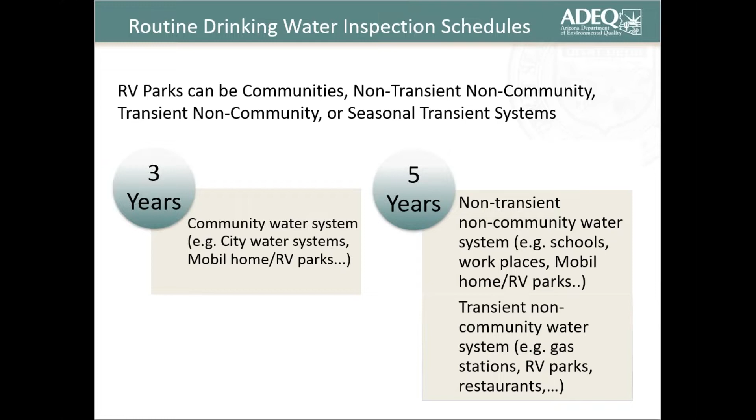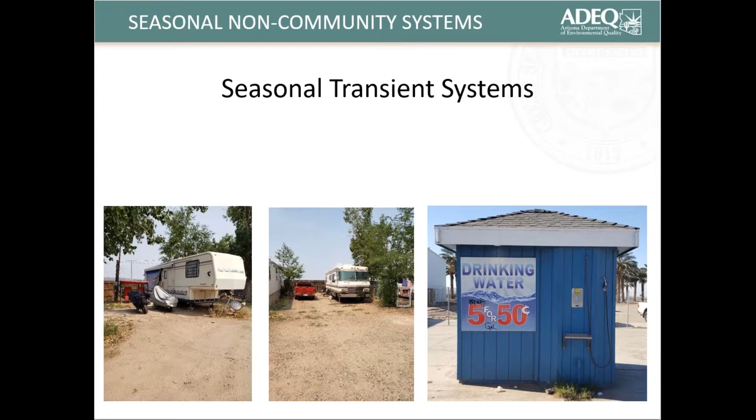We're going to go over our pre-inspection checklists on these systems. Not all of them are seasonal, but they do get inspected, so a pre-inspection checklist is always sent out to a system. So you got summer homes.

They can also be seasonal, to where residents live during the summertime or even during the wintertime in an area for less than 6 months, and they move back to their normal communities or homes in other states and even Canada. So camping sites are under this. Roadside rest areas like ADOT, rest stops on I-40 to I-10, they get inspected every 5 years.

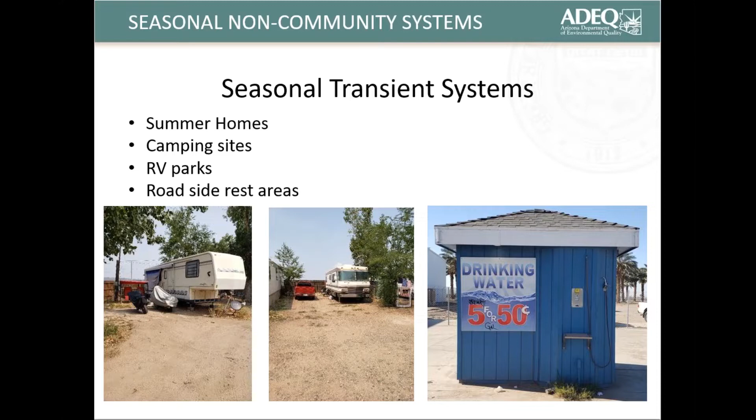Every 5 years. So as we schedule drinking water inspections, 15 days before announced inspection, we contact the system. It's either going to be the administrative contact, which is our first point, and if the administrative contact does say the designated operator will be the one running point, then we get a hold of him. Occasionally, we'll find the designated operator is also the administrative contact.

So just one contact. We always like to have 2 emails, one from the owner. Be sure to indicate to the inspector if you are a seasonal system and you may not even be open when we're calling. We don't know everything. We don't look closely at systems. We just get assigned and we'll look at them and try to give a call and see when we can set it up. If that's the case, we put a little note in saying that next quarter or in the summer we'll be out. Unless you close during the summer, then it'd be the winter that we'll be out.

If the system is currently open, then of course we're going to schedule the inspection within 15 days, or we would also like to know when you're available. So if that week is not working, we may just schedule it for the next week. You might not get 15 days, but we'll work with you. We don't want to send it out over a month unless you are not open, then we will.

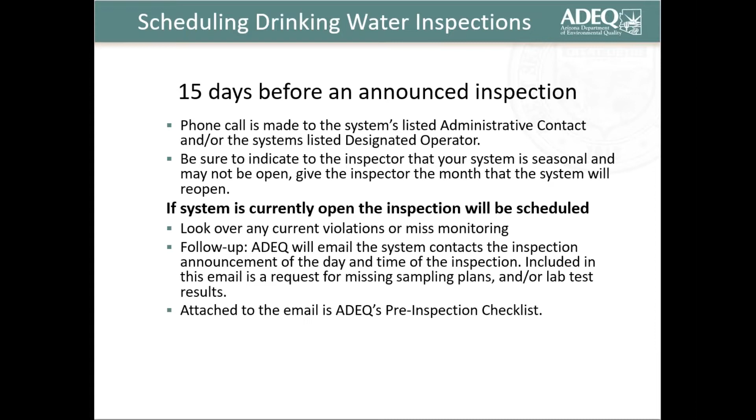So attached to the email after the phone call will be this pre-inspection checklist. And of course, we will also send this to the CAC, or copy them, so they can let us know whether or not your monitoring and reporting is a non-violation or non-issue. This is a seasonal startup form. I believe it's just 2 pages.

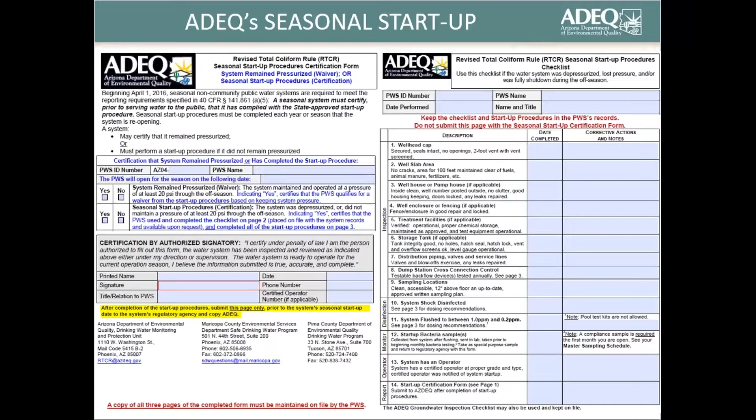We send this out, or the CAC will send it out, and you go through this seasonal startup procedure. You might already have one written down in a book, and that's fine, but you will have to submit this. We'll talk more about this in the next presentation with Jennifer Crow.

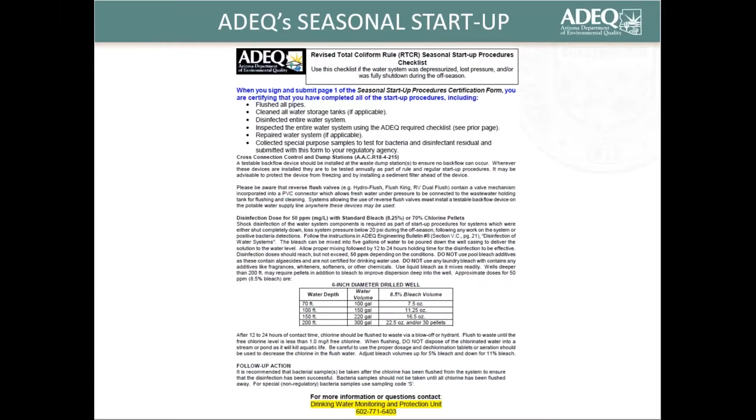We'll go over the seasonal startup paperwork for that. I believe this is the last page of this, and it talks about your seasonal sampling for your revised total coliform rule, and then you will continue monthly after that, and hopefully not having to do resampling, which costs the system a little bit more money. So we're going to prepare for that.

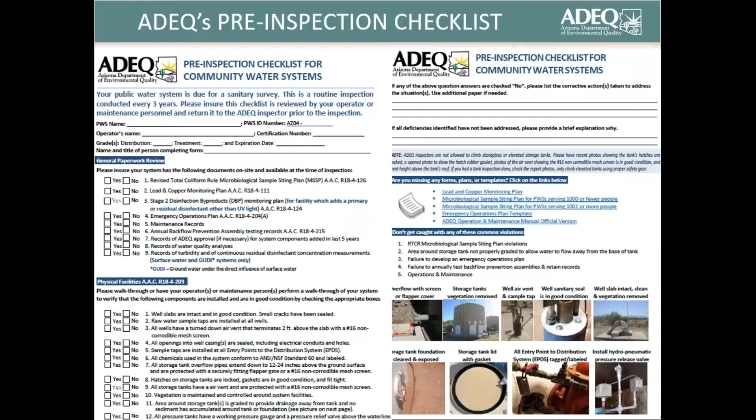This is what ADEQ's pre-inspection checklist looks like. Currently, it's 2 pages. On the left side is the first page, and on the right side is our second page. We'll look at this pre-inspection checklist a little closer in the next slides.

Top portion of the first page of our pre-inspection checklist goes over what would be a violation. So the public water system enters its name, their system ID number, their operator, the certification number, the grade of that operator. If it's a treatment system that runs with treatment, removing arsenic or nitrates, then he should be a treatment operator, at least 1 or above. And then we're asking for the expiration date, name and title of the person that's completing this form.

Could be the operator, could be a maintenance man. We don't require who does it. They don't have to be qualified. They just need to know how to follow the form.

Of course, all systems are going to have a revised total coliform rule to provide samples for. This pre-inspection checklist is for communities. We do have 2 other checklists for non-transient and an additional one for transient systems. So things are going to be a little different. However, this one holds all the information for every one of them. So we're going to go over the community system.

As a community, you'll have a lead and copper monitoring plan. You'll also have one if you are a non-transient system. Stage 2 disinfectant goes for both those systems also if you are using a disinfectant. If you're using UV lighting, then it is something else. You don't need to worry about disinfectant byproducts with UV lighting.

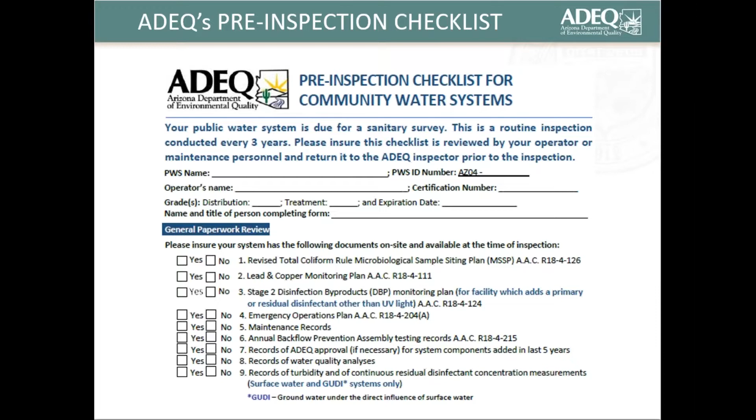You need to retain records of water quality analysis, records of turbidity on record or on site for surface water or GUDI systems. The lower part of the pre-inspection checklist is the physical walkthrough of your system. This is important. The inspector is going to go through this as well. And if you've already filled this out and checked yes or no and present it to the inspector, it won't stop him or her from going on with the inspection and looking through it also.

So you want to look to make sure your well slabs are in good condition. Got any small cracks around the casing, you can seal them with a product that you can buy - bath and tub tile, regrouting, silicone, anything. Since it does not involve the water, we don't need to see that it's NSF approved or ANSI.

A raw water sample tap is important so that if you do have a total coliform hit, you can go back to your well, take a sample there, send it to the lab with the other repeat samples, just to prove that the well is not the issue. If it is the issue, then you're going to be disinfecting your well until it becomes negative for total coliforms.

We look for air vents. They must be 2 feet above the slab and have a number 16 non-corrodable mesh screen attached to the end or somewhere in there. All openings in the well casings are sealed. Sample taps for the entry point are labeled.

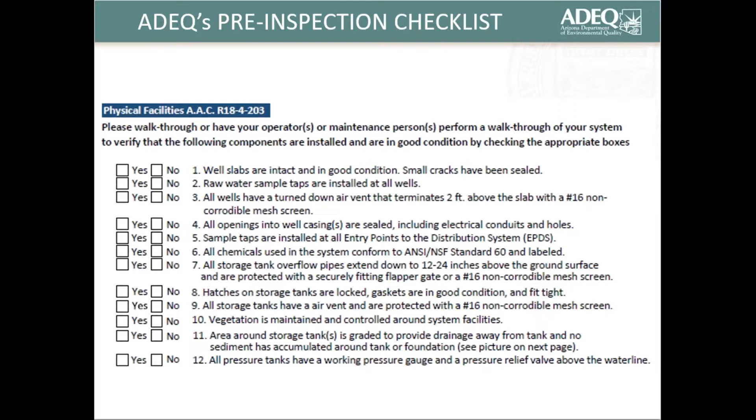Another thing we look at is a sight gauge. However, in freezing areas, we won't require you to replace it if it froze and broke off, because you lose a lot of your product by the time you realize that it cracked and broke. By the time you get to it, a lot of your water could have already escaped under the ground, and you're not going to get money back for that, especially if it's treated.

If you're treating your water, you don't want to see it pouring out onto the ground, nobody paying for it.

On the back side of our pre-inspection checklist, we'll have questions. If you check no to some of the items on the first page, we're going to want to know, did you address this situation? Did you correct it? And if you did not, please let us know why.

What is it? Was the well slab so badly deteriorated that you're going to need a month or two to get cement in there to pour a new slab? That's okay. We'll give you opportunity to correct that, maybe up to 90 days, depending on the weather situation. We don't want you pouring cement during a snowstorm or some other emergency that might be going on.

You have other things that might need to be taken care of.

So we're going to ask you questions about any of these forms here towards the bottom, lead and copper. You have an MSSP for 1,000 or more, an emergency operation plan, or an ADEQ operation and maintenance manual.

All these, as long as you have it on a computer and not printed out, you can take your mouse and click on these and it'll take you to the site where you can download the lead and copper plan, MSSP. You can get the emergency operation plan template out of ADEQ, follow that. Very simple and easy to use.

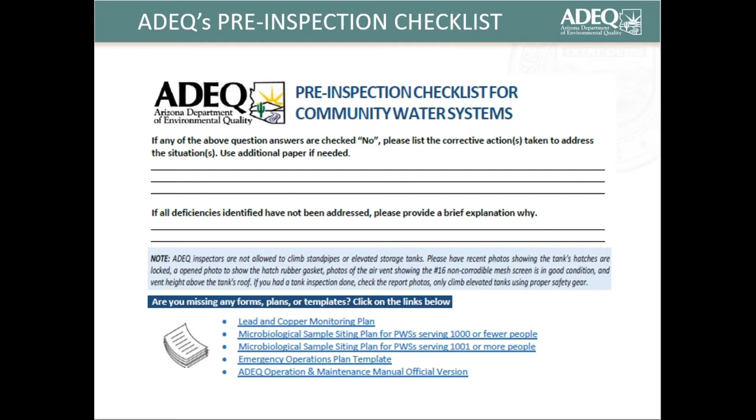We'll give you time, usually 7 days if it's an important item, or a month if you need to figure out who's going to replace your bottled water delivery system if that's no longer part of your plan. They could have gone out of business.

So at the bottom of the pre-inspection checklist and the final portion of it is where we're going to have some pictures of, don't get caught with some of these violations.

Not having an emergency operation plan is a violation. You haven't tested your backflow prevention assembly, or retaining the records. You might just have the latest one. Well, we're going to know. Have you been testing it before, or is it just time for an inspection? We'll make sure we get it tested.

All right, and then operation and maintenance. So if you have any type of arsenic treatment or removal of any other contaminants, we want to make sure you have a manual for that.

A lot of times you can go online if you have lost your manual that came in with your product to show what is the maintenance for this. Is it every year you must switch something out, or is it every 5 years after an inspection?

So down here, we changed these photos. In the past, our photos were things that looked bad. Some of these systems said, well, it wasn't as bad as what the photo looked, so we thought we were okay. So we kind of changed it around. We're always evolving here, so we put in good photos. If it doesn't look this good, then maybe you'll want to fix it to look this good.

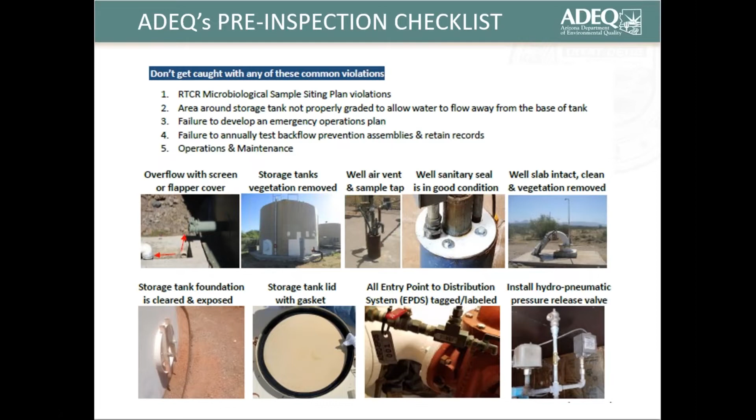We have a picture of a gasket on the storage tank lid that looks like it's in very good condition. We have an EPDS, entry point to the distribution system, tagged and labeled in the proper location. And then the very last photo there is the release valve for a hydropneumatic tank. That's very important so that the tank doesn't get overpressurized and air is released and not water. So it's above the water line, as you can see, it's on top.

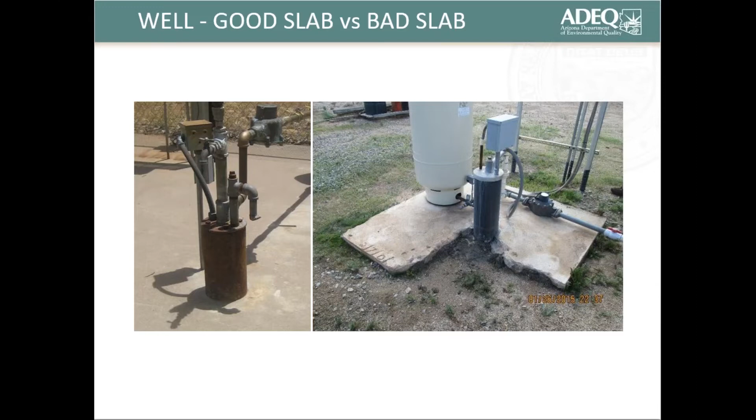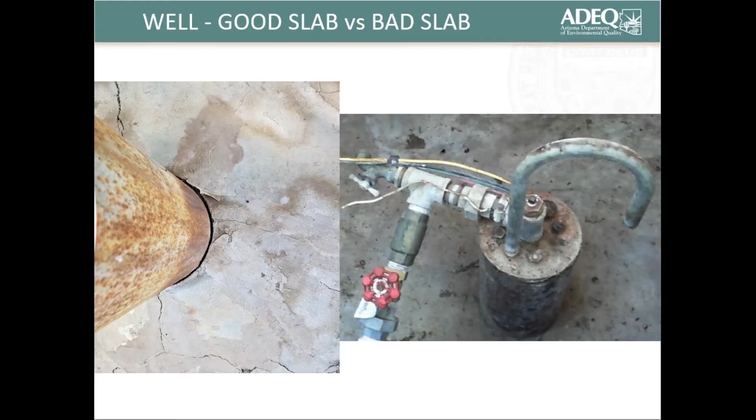And my computer's slowing down. All right, here we go.

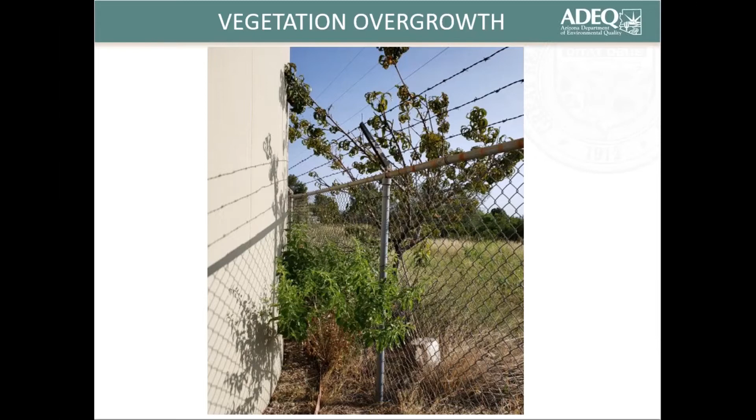You want to expose that ring and the lip of the tank so it stays dry during weather. And this is what it looks like.

This is a different tank. You can see they were asked to grade this and clean out the inside of that ring with the soil. The soil was up above the lip of the tank, as you can see where they painted up to, and it got even worse as it goes around the corner, with how much soil was up against that tank. The lip is always a requirement for us to see, because we want to see that it's dry and not holding moisture where it can start rusting.

This is a tank. It costs money to disassemble it, remove it, and bring a new one in. So if you want your tank to last forever, treat it like you want it there forever.

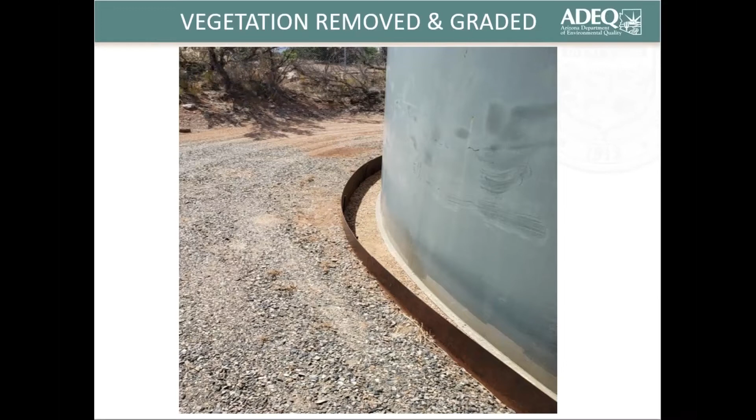Now we're going to look at a soil run-on to a system well that they thought was just fine because, hey, that casing's way up. Well, we cleaned away the dirt down there to check the slab, and we can see that it has a hole next to the casing where the water runs on into this rock area that is protecting it, but now it's holding water until it either drains through that hole or evaporates with the sun and heat.

So this is called out, saying that we need the slab to be up higher and the area graded so the stormwater that rushes in moves around it.

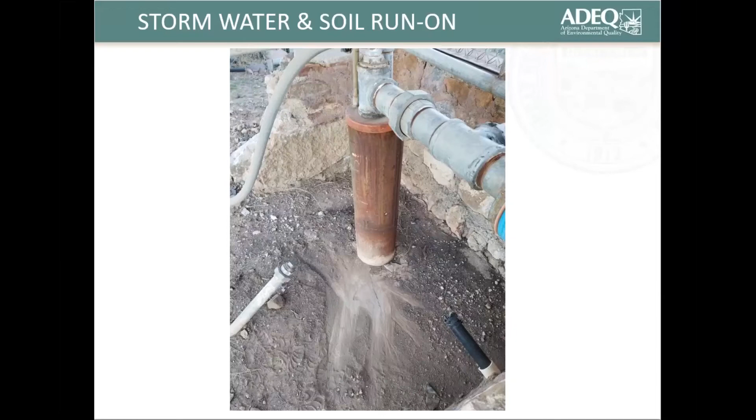So they agreed, and built this small little cinder block. Looks like it's only going to be about a foot to a foot and a half, but that's all they needed. Also raising the slab, and around the casing there was a hole, so they needed to put in another 3 inches of cement. It took some time and some labor, but it got done.

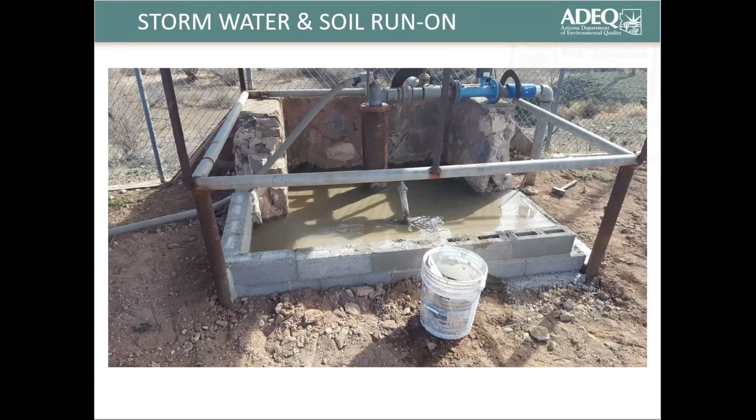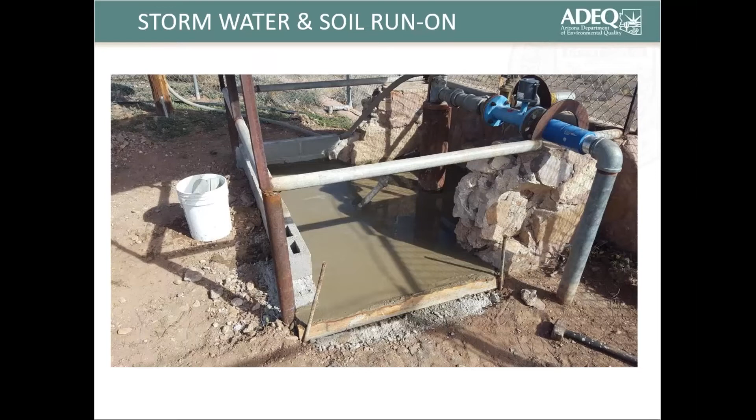A taper was done because it's still going to rain, and if the rain runs sideways, it's going to put water in there. We want that water to come out—we don't want it to sit there and do the same thing again, preventing a hole from causing water to run down the casing. So they did a very good job.

And here's the before and after photos. As you can see, they did have an awning over it the whole time, but it didn't prevent the stormwater from coming on there and ruining their cement slab. Much nicer look now. I'm not sure what the other 2 pieces are—there might have been other electrical outlets that came up there, or it might have been a sounding tube. Either way, they're capped and sealed, so we don't worry about it.

Now we'll look at some seasonal transient systems prior to you starting up. Understand most of you guys are already in and moving along, and your winter visitors are already starting to show up. So let's look at what you should be doing prior to the park becoming fully occupied.

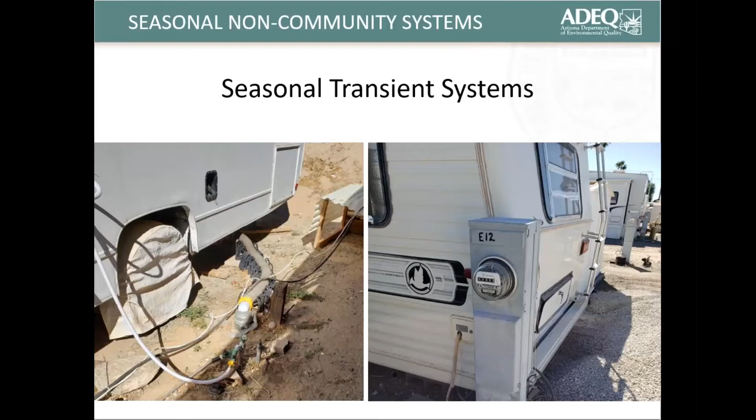A lot of times these RV systems might have 1 or 2 residents year-round, be a maintenance person, or it could be the manager on site. So this is a winter area—during the summertime, nobody's there. They may drain it, or they may leave it pressurized, as this one is, because someone was there on the property, which was the manager. However, they just go throughout their business in the summertime, never checking on this.

We open up the doors and look inside, and plenty of dust storms came through this area—we have grass growing on the inside. So you don't want it to look like this. You could literally short out your system and then have to have an electrician come in to get it fixed and rewired, and of course that'll cost you money again.

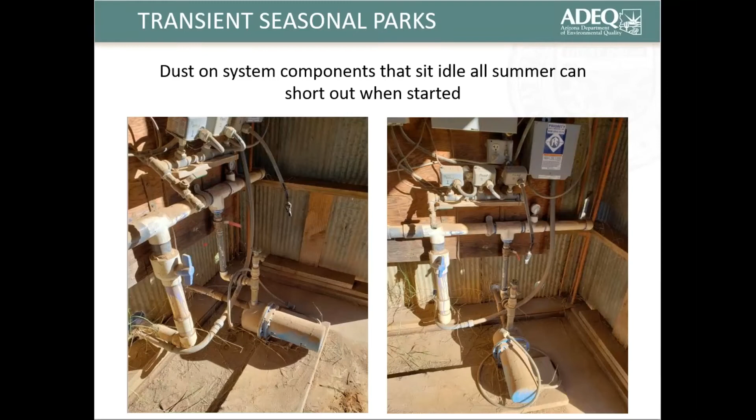A few more pictures of idle systems. This one here, you could get a bac-T positive just from looking at the picture on the right side.

It just does not look good. The residents there were just a few, so they didn't have to sample, or the operator didn't even visit. This kind of stuff was leaking. It was summertime, so it dried up and never pooled any water, so no one even noticed there was something leaking since there's no evidence.

But as an inspector, I'm going to ask for that to be cleaned up, maybe taken apart and put back together, hopefully with some Teflon tape to help it seal. However, you might want to just replace all the components. These are plastic piping, very easy to cut out and stick a new sensor in for your well to click on and off with.

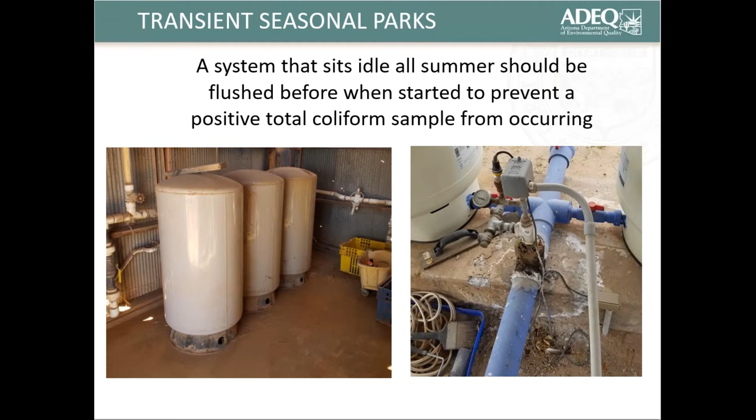Flushing your system - you may not have a huge storage tank like you see here, but flushing the storage tank isn't the only thing that needs to be done. You need to follow up by going to the end of your lines. If you have plenty of dead end lines, start running them out, getting that line cleared, especially if it was not pressurized. Then you want to remove the air in the line too.

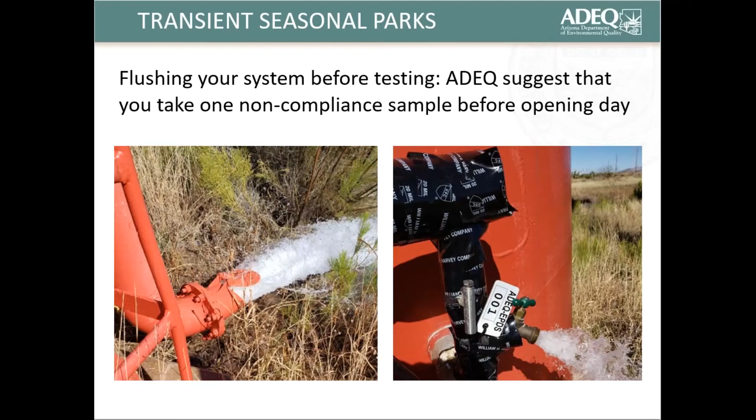Run your EPDS, where you can see it's tagged there as 1. Run it for a while before taking a sample. This is not where you take a Bac-T sample, so you're just going to be taking your annual samples, whatever they are for this system.

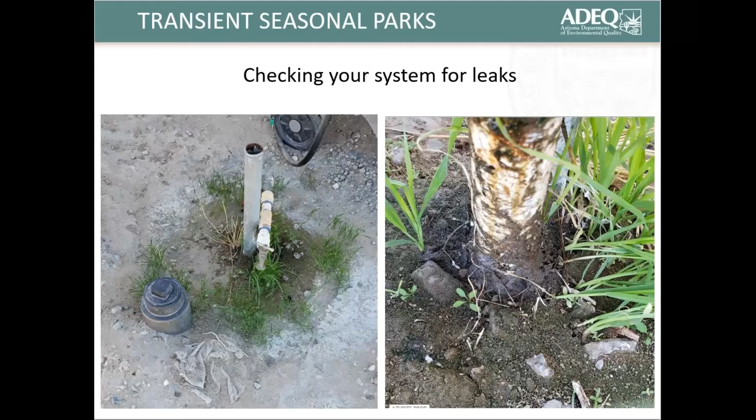Again, it's 115 degrees out. Very hard to see this leak unless you walk up to it, since it's not going to show a big puddle - it gets evaporated as it leaks. It leaks slowly, evaporates rapidly. But vegetation is a big sign. If you see a lot of grass growing around an area where you know you have a water line, go check it out. You're not there irrigating, you're there for a customer.

This one here is very hard to see, this tap that was leaking, and it is leaking around the handle to the spigot. One, the spigot is sitting on the ground, it's not up a few inches - we like to see a whole foot up off the ground. Picture on the right, it's leaking also.

However, I thought it was leaking at the connection for the hose bib. It is leaking at the sewer. Up there, that line is cracked underneath that dirt. Someone buried it so they didn't have to see it, but yet it seeps out, as you can see. And if you've taken a sample there, which I wouldn't recommend, no sample should be taken next to the ground like that. This should not be a sample location for the Bac-T program.

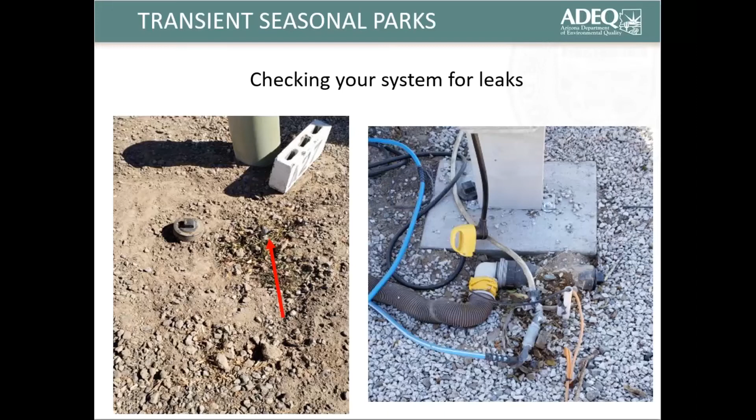Another one where they have the water spigot next to an open sewer line. Where's the cap? I don't see it in the photo. So did the last person using it lose the cap, take it with them? We don't know. It's the responsibility of the RV park to have extra caps to place back on there, because the person using this water spigot has an open sewer line next to it. Might not be a healthy place.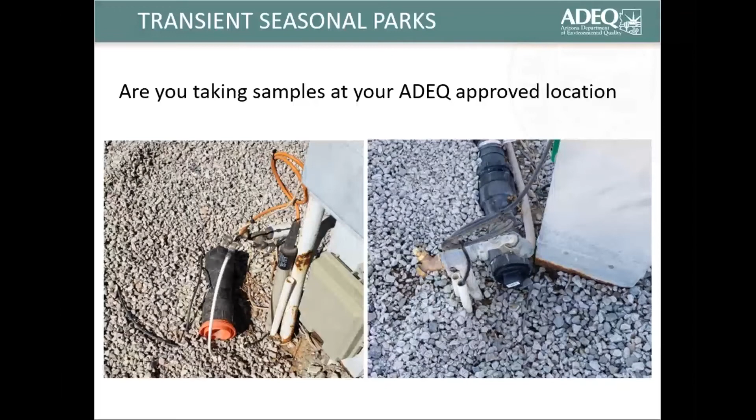Picture on the right, kind of the same way there, low to the ground. Someone hooked up their hose right there next to the port for the septic system. This is what it should be - you got it off the ground a whole foot. I would use the sample tap on the left picture towards the right; it's away from the sewer line.

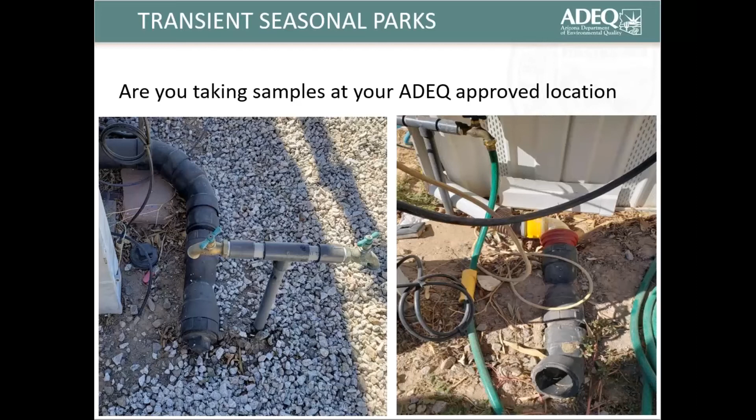The picture on the right has an open sewer line there. However, they're sampling on the tap that we can't really see on that T. I took the picture because that is a broken sewer line - the cap cannot go back on. They were going to have to replace that and then get the cap to screw back on. So something broke it - could have been a heavy piece of equipment, could have been the trailer itself. We just know it's broken and should be replaced.

Now, you want to protect your system from all your customers showing up. They have older models, newer models, RVs or fifth wheelers. However, they don't have a backflow device on it to protect them, so you're going to want a vacuum hose breaker on your spigots. They are very inexpensive, however if you have 100 to 300 spaces, that's going to cost you a pretty penny to buy one for each. So I recommend the one that has the locking screw on it.

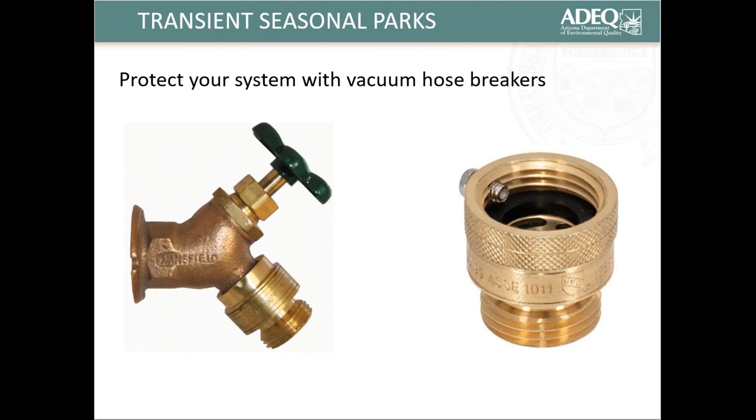This way, when they unscrew their hose, the whole thing doesn't come off and they leave with your vacuum hose breaker. However, there's so many different types out there, and some cheap ones you can put on. You just risk the chance of losing it or someone removing it, and they might not even know it. They could have had somebody else take their hose off, and when it came off, they believed it was supposed to come with the hose, not knowing it's actually supposed to stay on the spigot itself. So think about buying those.

We're going to go over a little bit of ATC and AOC, since maybe you replace some components in your system over the summertime or over the wintertime. Whichever seasonal system you are, you'll be shut down. You may put in a new booster pump, or you may service your well and put in a new well pump. If you put in a 7-gallon per minute pump and you had a 7-gallon per minute pump, there's no need.

However, if you changed it, say you wanted more capacity, more production out of your well, so you put in a bigger one, or you put in a tank because you wanted your well to rest a little bit from the customers, and you're going to use tank water during the day, and at night your well will fill up your tanks.

If they're not known by ADEQ, then you need to get approval to construct, and inspectors can help you with that paperwork, but it will be a violation if we find that you did not do the paperwork. So you can always call your CAC, your Compliance Assistance Coordinator for your county, and ask for an engineer.

Engineers will help you. ADEQ engineers want you to pass inspections. They want you to be in compliance. So they'll help you with the paperwork, and they will coach you into the proper signatures, the proper stamping from the engineer that put it together for you, and they'll sign off. A lot of the times, there's no fee unless you're trying to put in a treatment.

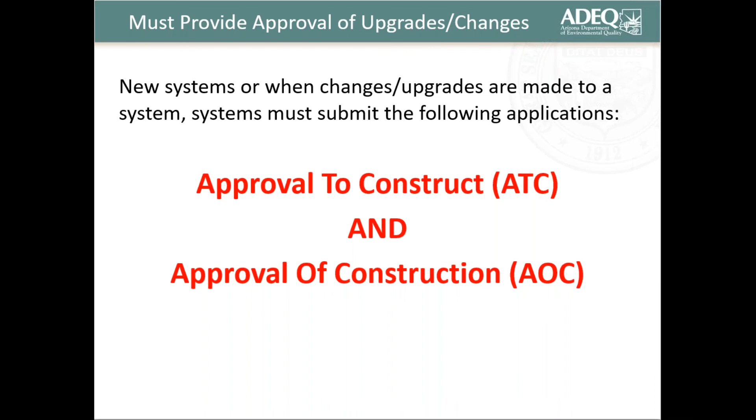Let's say that you got tired of your hard water, so you're going to stick in a softener. But that is a reviewable fee for ADEQ, so you will have the proper fee sent in with your application and your drawings. They can tell you what it will be, and they can also let you know whether or not it won't be a fee. And with the approval of construction, there's never a fee. It's just showing us that you did build it the way you got approved to construct.

So here's the approval to construct. Changes, upgrades made, we'll just read it out here. Systems must submit the ATC application if you're a new public drinking water system, you modify an existing facility, or you make an alteration that will affect the treatment capacity, water quality, flow, the distribution, or the operational performance. So you have to look at all of that in order to put in your ATC.

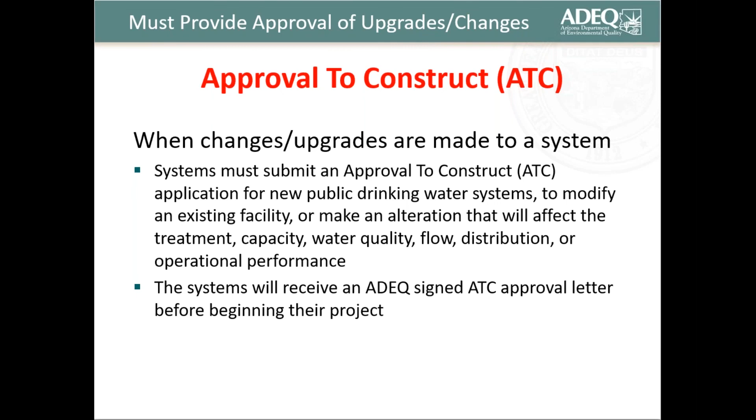Always put in an ATC, in my view. You can always call in and ask whether or not this is going to be a reviewable fee or have no review fee. Very simple to do. Then the system will receive their ATC approval letter before beginning their project. A lot of times they've already started their project, they don't wait for the ATC. So if it's not approved, please look at it and find out what the engineer is asking to be changed.

All right, so here's your approval of construction. No fees are associated. It satisfies any deficiency requested from the department. So post-construction review: the system shall collect their initial monitoring samples if you're a new system, of course. And if you are a seasonal system, you will collect your initial monitoring samples before starting up. During the system's sanitary survey inspection, the water system must provide this paperwork.

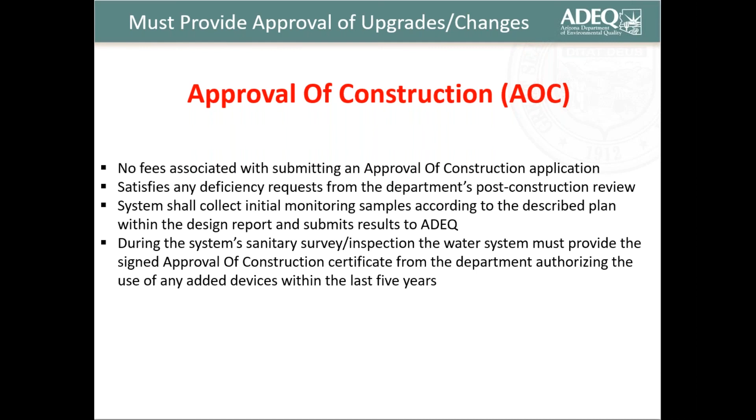A lot of times the inspector will find this paperwork if they look for it and if it's available to see, and if they're aware that a new component, or this is a new system, is there, they might bring this information with them so they can say, okay, you have the paperwork here, do you need a copy of it? Sometimes they get lost, or maybe they just didn't see it, or you didn't think it was important enough to keep. But it is very important to keep all your approval to construct and approval of construction paperwork.